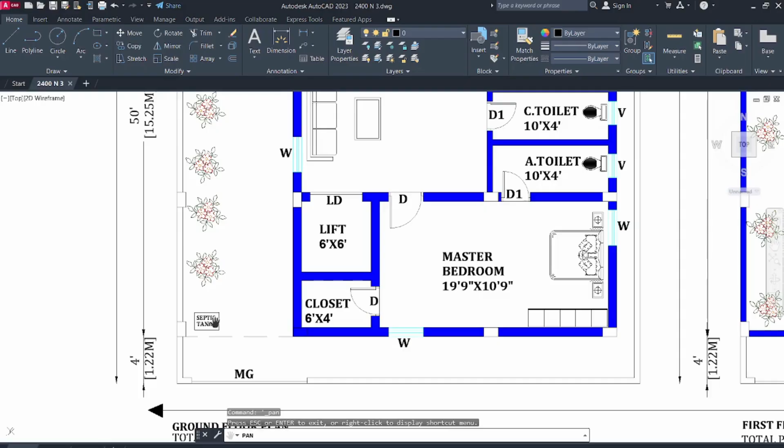We have our main gate over here, and the ground floor features the primary living spaces and perfectly sets up the foundational Vastu energy for the home. The main gate opens into a long parking passage of size 9 feet 6 inches by 59 feet, and the septic tank is properly placed in this corner. This is the ideal Vastu zone for movement, vehicles and waste disposal, so we kept the same here in the northwest direction. You can see the septic tank is over here.

Coming to the northeast corner, we have our underground water tank or bore or well, and this area is ideal for placing the underground water zone. It is the northeast corner, that is the Ishan corner, making it the most sacred place to keep the same. So let's get into the room.

Through the main door, we have a living room of size 15 feet 9 inches by 26 feet 3 inches, and we have our dining space over here of size 10 feet by 10 feet with a 6-seater dining. Through the dining room access, we have a kitchen in the southeast corner, and southeast is the fire corner or Agni corner, which is the ideal place for keeping the kitchen. So we kept the same here, and the kitchen measures 10 feet by 10 feet. We kept our stove in the east position and the water sink in the northeast of the kitchen.

We have a little utility through the kitchen of size 7 feet by 10 feet, and we have provided a washing machine over here. One more thing, we have a door access to the backyard from the utility area, so we can access it from the outside, or we can move our heavy items from here to the backyard. So it is convenient to keep the door over here.

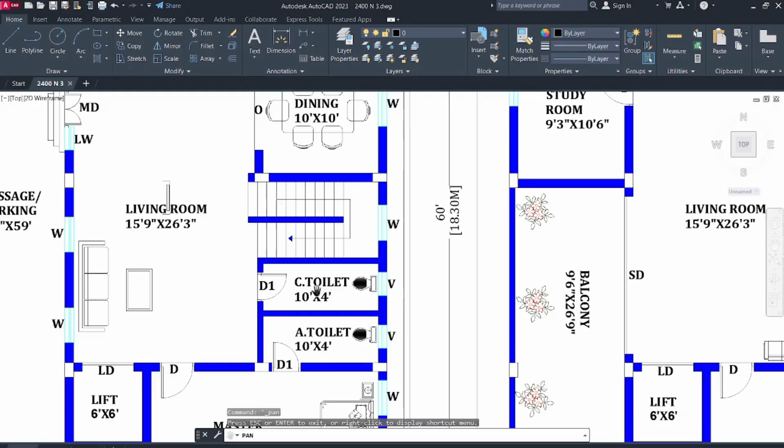We have a common toilet next to the staircase of size 10 feet by 4 feet, and we kept our commode pointed towards north. As per Vastu, usually the commode should be pointed towards north or south. Here we kept it towards north.

Coming to the master bedroom, it is located in the southwest corner, which is the ideal place for the head of the family to rest, which increases stability and strength to the family. So we kept this bedroom as a master bedroom, and it measures 19 feet 9 inches by 10 feet 9 inches. We kept the bed sleeping position south and the wardrobe in the west. We have a closet of size 6 feet by 4 feet inside the master bedroom.

Here we have an attached toilet of size 10 feet by 4 feet with a commode pointing towards the north direction. And next to the master bedroom, we have a lift of size 6 feet by 6 feet.

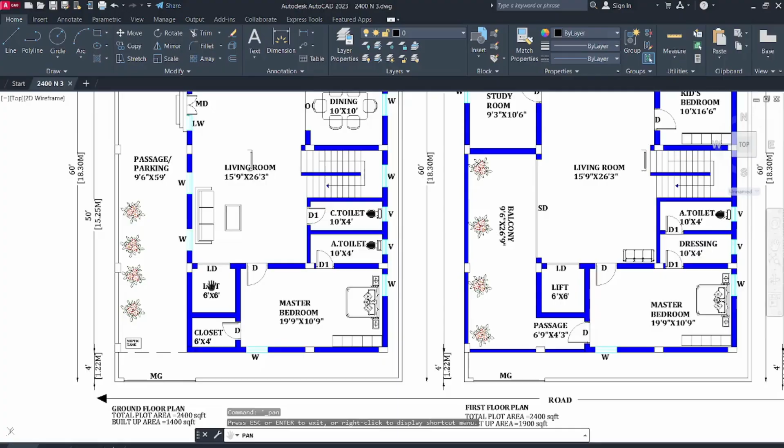Coming to the first floor plan, through the internal staircase we can get into the first floor. Here we have a living room of size 15 feet 9 inches by 26 feet 3 inches. And this central space, that is the Brahmasthan, we kept free from pillars. I forgot to mention that for the ground floor.

Here in the northeast corner, we have a guest bedroom of size 19 feet 9 inches by 10 feet with an attached toilet of size 5 feet 3 inches by 10 feet.

Here we kept our commode pointed towards north direction, and remaining the same. And outside the guest bedroom, we have a study room of size 9 feet 3 inches by 10 feet 6 inches. And here we have a kids bedroom in the southeast zone, and we kept our bed sleeping position south and wardrobe in the west.

This kids bedroom is measured in the size of 10 feet by 16 feet 6 inches, with an attached toilet of size 10 feet by 3 feet 9 inches with a commode pointing towards north direction. And here in the southwest we have a master bedroom of size 19 feet 9 inches by 10 feet 9 inches, with an attached toilet of 10 feet by 4 feet with a commode pointing towards north, and through the dressing room of size 10 feet by 4 feet.

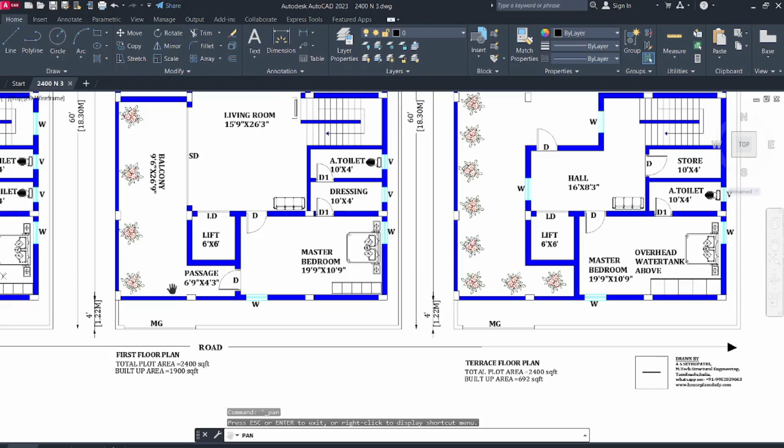From the master bedroom, we have access to the dressing room. Through the dressing room, we have access to the attached toilet. And next to the bedroom, we have a lift, as I already mentioned at the ground floor. So we have a little passage from the master bedroom to access the balcony. And this passage measures 6 feet 9 inches by 4 feet 3 inches.

And here we have a balcony in the northwest zone of size 9 feet 6 inches by 26 feet 9 inches. This north open space is highly encouraged, keeping the north side open and light to invite prosperity. So we kept the same here.

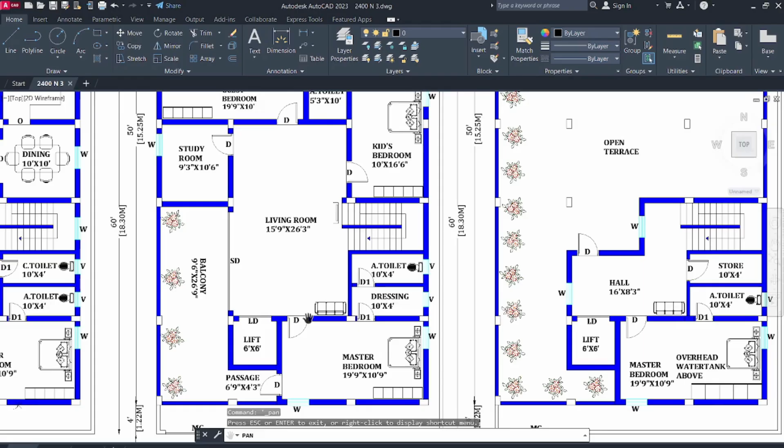And coming to the terrace floor plan, the top floor utilizes this open space efficiently and caps off the house in Vastu compliance. A massive open terrace covers the north and east side of the roof, and Vastu dictates that these directions should always be lighter, lower, and more open than the south and west. So we kept the same.

The southwest heavy zone: the built-up area on this floor, a hall, store, lift, and third master bedroom, is entirely concentrated in the south and west. So we need to keep the south and west heavy. So we kept the same over here, and we also kept the overhead tank over the master bedroom, that is the southwest corner, placed directly above the southwest bedroom. It is a golden rule of Vastu that the southwest corner must be the highest and heaviest point of the entire building.

We kept the same. And coming to the room by room dimensions over here, we have a hall of size 16 feet by 8 feet 3 inches. Through the hall, we have access to the open terrace. And next to the staircase, we have a storeroom of size 10 feet by 4 feet. And here we have one more master bedroom of size 19 feet 9 inches by 10 feet 9 inches.

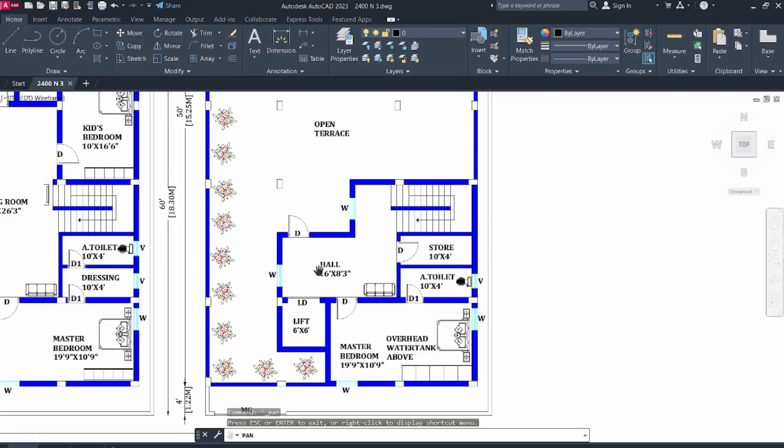And we have a bed sleeping position south and wardrobe in the west, with an attached toilet of size 10 feet by 4 feet. And in this attached toilet, we have kept our commode pointing towards north direction. As I mentioned earlier, we kept an overhead tank over the master bedroom, that is the southwest portion of the plan, which is highly apt for Vastu. So we kept the same.

And coming to the overall summary, this house plan is exceptionally well designed according to Vastu Shastra, and it flawlessly executes the four most critical rules: water and worship in the northeast, that is the underground tank and puja room in the northeast corner, the Ishan corner; fire in the southeast, that is the kitchen in the southeast corner; also weight in the southwest, with the master bedroom in the southwest on all three floors, ground floor, first floor, and terrace.

And also the masters stacked in the southwest, topped by the heavy overhead tank, is an add-on advantage. And air movement in the northwest: the parking passage and septic tank are in the northwest, which is ideal for wind movement and ideal for keeping the septic tank. So that is the overall plan explanation.